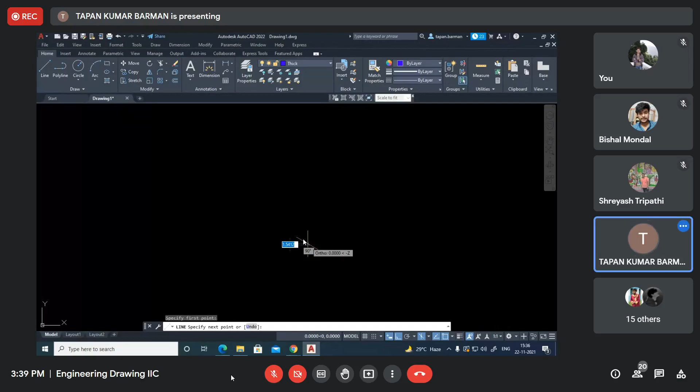So I'm starting to make one block.

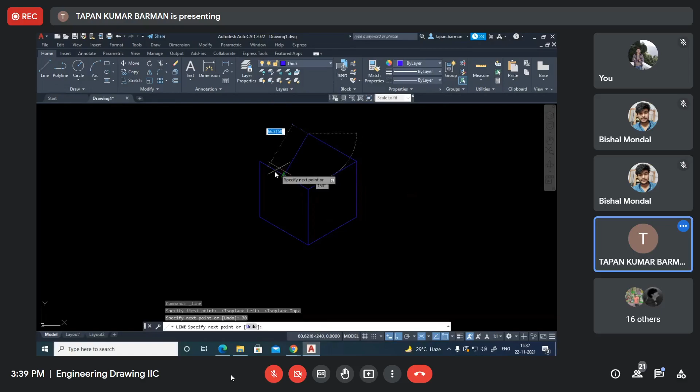Here we'll try to provide the dimensions. First thing, to provide the dimension here, we have to use align dimension. So I'm taking this one.

First thing, I should change the layer, so I should use a dimension layer. Say for example, I'm trying to provide the dimension from this point to this point of this line. Then dimension aligned from this one to this one.

The dimension shown here is not correct if I compare the drawing with this one. So always in our isometric drawing, we try to align the dimensions with the lines.

Now, how to align this dimension? So this dimension, or the extension of the dimension line, should be aligned with this line. Understand? If I provide another dimension,

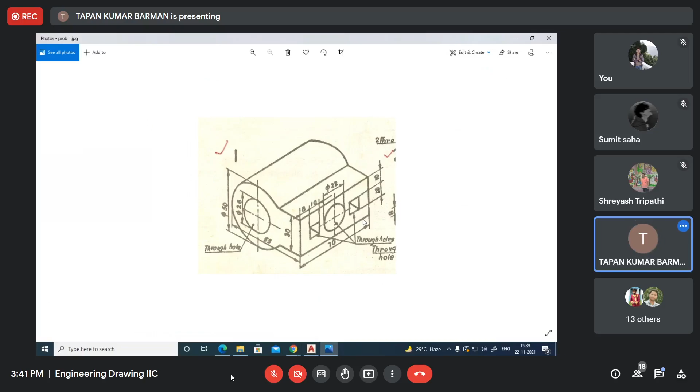So when I am trying to provide the dimension using align mode, but it is not aligning with the line, then what do we have to do? We have to do something else to make the dimension line align with this line. So to do that, we have to use the oblique option.

So if I consider this oblique option, you see, select objects. Say for example, I want to align this dimension line with this one. Understand? So here I will select this dimension. If the selection is correct, I will press enter.

Now here you see, enter obliquing angle. Now what should be the angle? So here we have to measure the angle from the east, that means from this line, and the line is making an angle with this horizontal line. If I draw one line here, this one, so with that line, that blue line is making a 30-degree angle.

As I mentioned earlier, in isometric drawing we have to make the lines with a 30-degree angle. So here also we'll try to provide that obliquing angle here. Say for example, I am putting 30 degrees here. You see now,

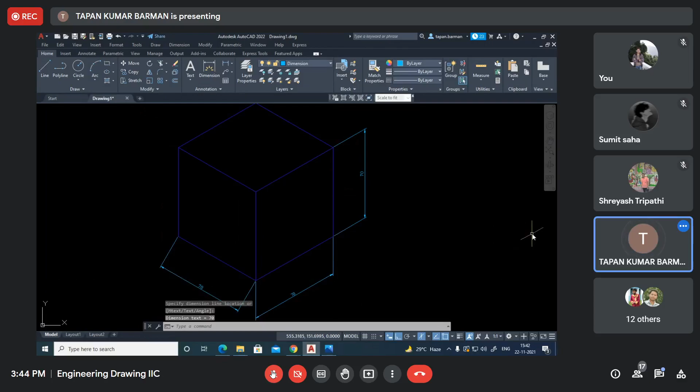Okay, then what should be the value? Dimension oblique. Now tell me, what should be the value here? Because this dimension should be aligned with this line. Do you understand? You have to measure the angle from the east in anti-clockwise direction up to this point or up to this line. The total line angle should be 270 degrees. Here again, you have to put 270.

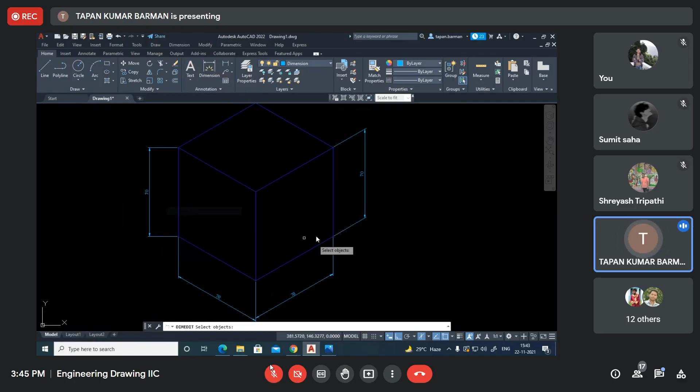Is it clear? Say for example, I want to put the dimension of this from here to here. Then make the oblique of this angle. What should be the angle now? The angle made by this line. What is the angle made by this line?

90 plus here how much? 60. Or 180 minus 30? 150. Okay, so if I put 150, then it should align with this.

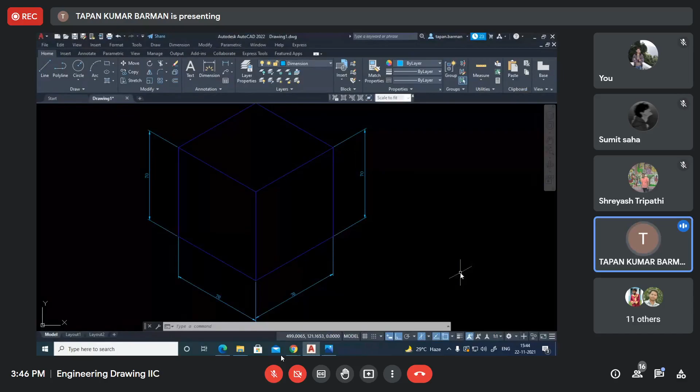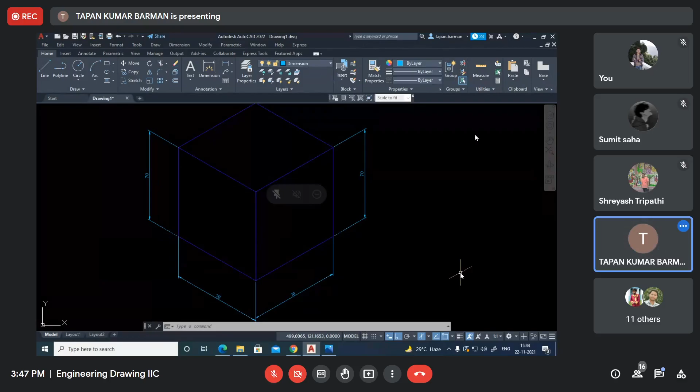Is it clear to you how to change the dimension here in AutoCAD for isometric drawing? Can you do that thing? Is there any difficulty to understand? Anyone, please try to do this thing and clear your confusions. Please practice and let me know. Any question, please?

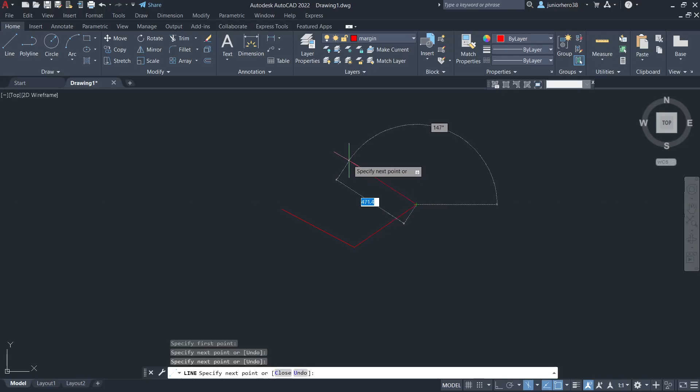Shreyash, have you done it? Sir, actually when I'm selecting dimension it is not getting selected. Then you share your screen. Then I can help you. Understand? You try to share your screen.

Sir, like I've drawn this. Isoplane left. Okay, go for dimension. Yes sir, I have selected. First sir, you go for dimension. Put one dimension. Aligned. No, first you take aligned. Okay, aligned. Okay sir.

Put one dimension. Without any dimension, you cannot edit that thing, right? Understand? So there should be one dimension to make the edit of that thing. Okay sir, now you can edit it. Clear? Yes.

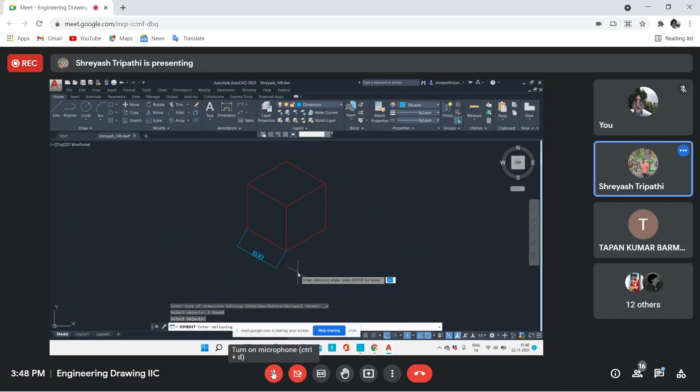Shovik Pramanik, what angle should be given, Shreyash, please? Are you doing it? Probably you may share your screen, then I can help you. Share your screen, I will help you.

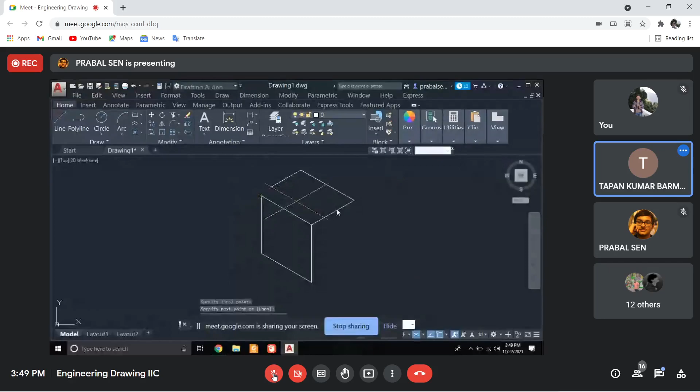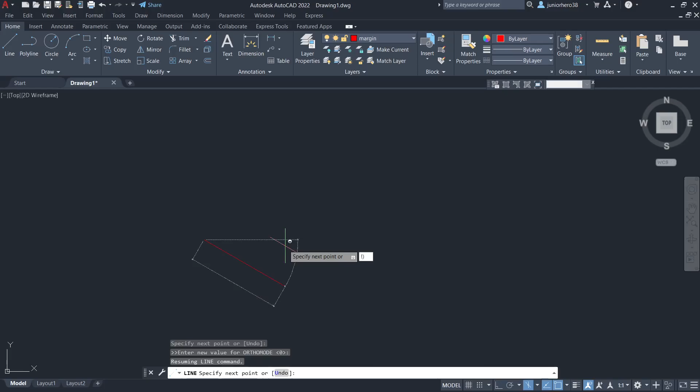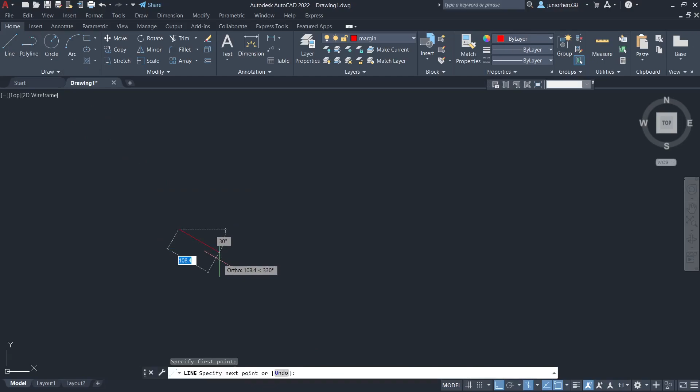If the figure is like it is a distorted figure actually. No, first that you take ortho option on. Yeah, I have taken that ortho option on in this, but I am just asking for that case if the ortho mode is not on and this line is not perpendicular, then also can I give the dimension? Anyway, you try to provide the dimension. Later on also you can do that thing. Okay, you try to put the dimension.

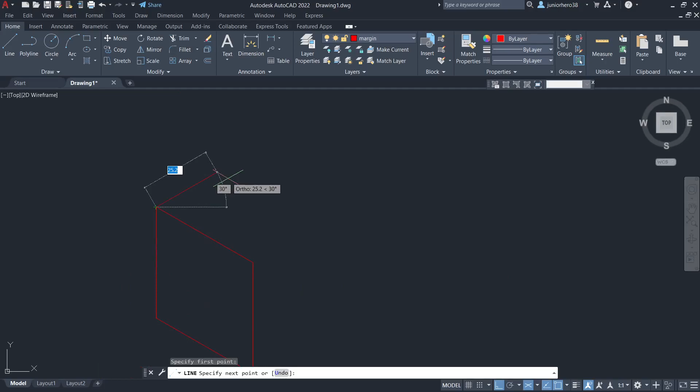Yeah, I have done that and this also. Okay, now you have put one dimension. The thing is you have to align that dimension with your lines. Yes sir. Okay, you take the side dimension. Okay, you take any one. Yes, probably that one. Now you go for the dimension editor, oblique option.

Go to dimension and take oblique. Okay, now, no. Okay, escape it and yes. Select object. Select the dimension. Select that line. Okay, enter.

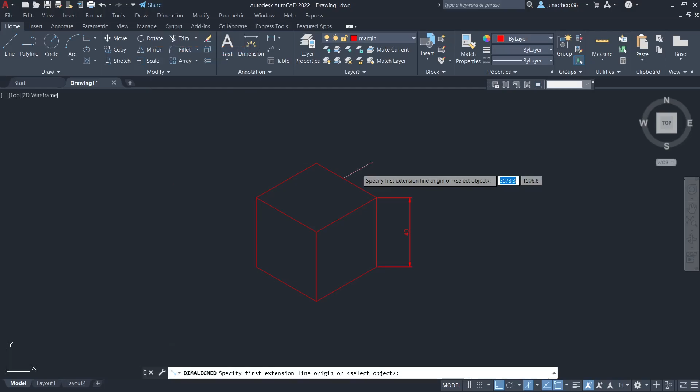Now you put the obliquing angle. What angle? So you have to align the dimension with the lines. Which lines? There are two lines. This line. What is the angle of that? That is 180 minus 30. 180 minus 30, yes, 150. Yes, you put 150, you put 150 angle.

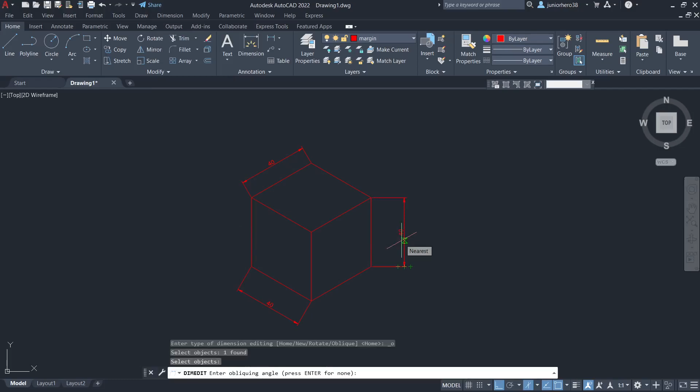Understand? So this way you have to find the angle and easily you can do that thing. There are other options also you may explore without considering this angle. But you just try to explore that.

I want to align that with that face, that surface, the upper surface. Yes, then if I write 30, no problem. So what should be the angle? 30? It is not 30, it is basically 150. It is 150.

You have to consider the final position of the dimension. Enter, 150. Yeah, see, always here 150. Always in AutoCAD, angle is measured from the east in anti or counterclockwise direction. Okay, so you have to remember that thing, how we are measuring the angle in AutoCAD. If you change that setting, then the angle value will also change. Understand? Okay sir, yes, clear.

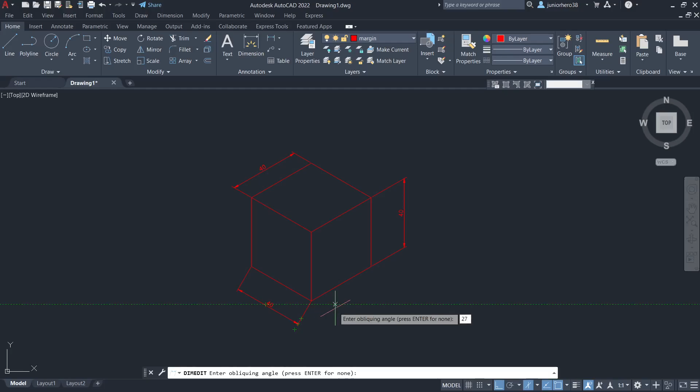No, take oblique option. Select object, enter. No, first you have to enter. Escape it, yes. Dimension. Follow the command line, okay? Select object, enter. Now you put 270 degree.

270. Right? Yes, sir. Thank you, sir.

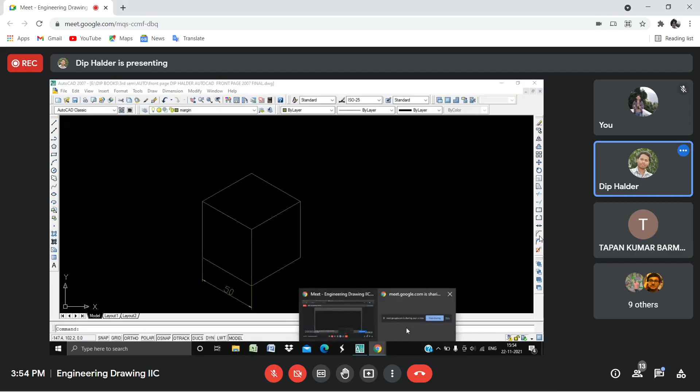Okay. Sumit Saha, Suchandrima. Okay. Shumit Shah,

Yes, sir, are you doing? Is there any problem? Krishna Bar, is there any problem? Suchandrima, is there any problem? Please let me know. Kamal Burai, are you with your laptop or not?

Reetam Sau? Yes, sir. Done. Okay, so there is no problem, I think. No, sir. If you have any problem, please let me know.

Now you see the figures. Say for example for this one. So in this assignment you have to make 3 drawings in one single A4 template.

I have started to present it. It is not presenting. But it's showing here, it is presenting. I don't know what is happening here. Okay, so it is taking too much time. Anyway,

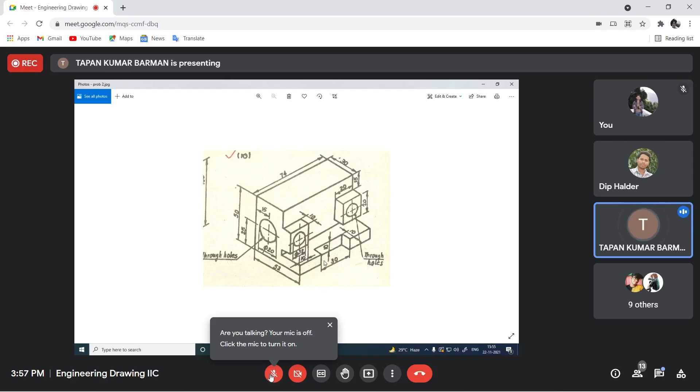So I think everything is okay with this drawing. Easily you can do this thing. For the second drawing, you see here also there are different parts of this. Here you will find some circles. There is one step, okay. So from this isometric drawing, try to do this thing.

It's another one, the third one. Here probably it is φ18. So if you do not get the value from this appropriately or proportionally, you may assume the value. Okay.

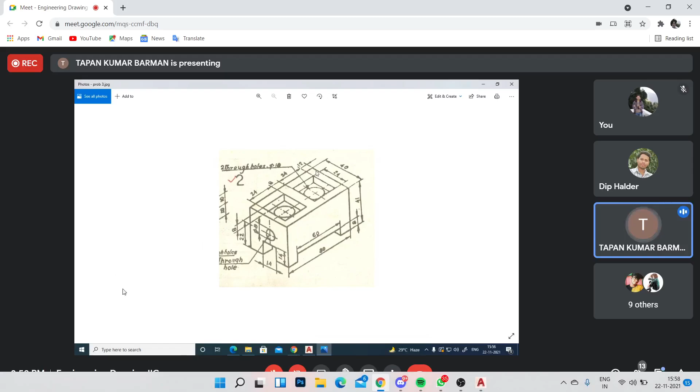Is there any problem? So first you try to visualize the object, try to make that thing. After finishing the drawing, try to put the dimension, and then only align the dimension with the lines. So is there any problem to make these 3 drawings?

So what you have to do? You have to take one A4 sheet, A4 template. So in the A4 template, you have to take 3 viewports, and using 3 viewports, you have to fit these 3 drawings.

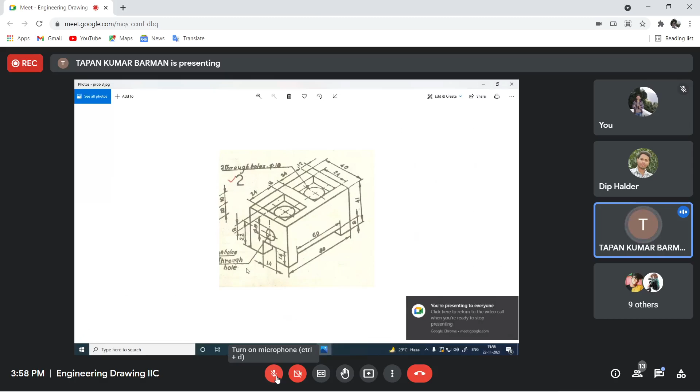1, 2, 3. Understand? There should be 3 viewports in your A4 sheet, and you have to fit these 3 drawings in that A4 sheet. So all the drawings should be made in model space, not in paper space. Is it clear to you all?

So if it is required, one can take one lower viewport scale also. No, 3 viewports. There are 3 drawings, so there should be 3 viewports to show these drawings.

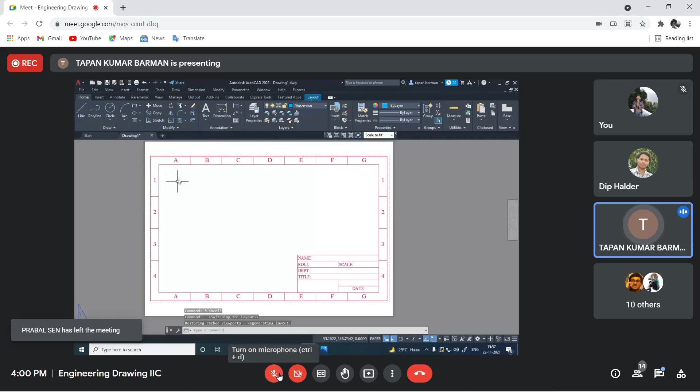In one model space, you will make 3 drawings, right? But in your A4 template, there should be 3 viewports to show 3 different drawings. Is it clear? Say it again, sir. Say for example here, so there should be 3 viewports.

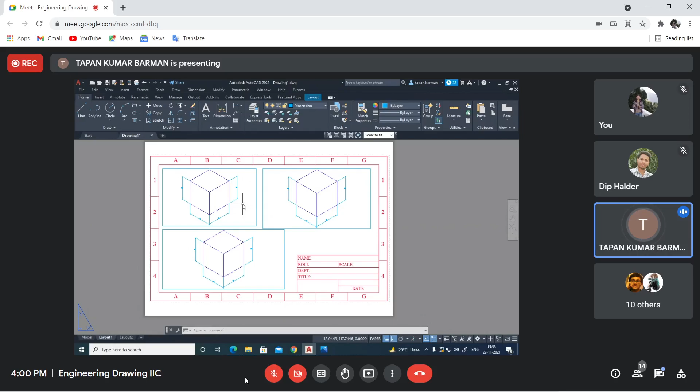One viewport here, another viewport here, say another viewport here. Is it clear? In these 3 different viewports, there should be 3 different drawings. Though the space is same, it's model space. Inside this viewport, all the spaces are model space.

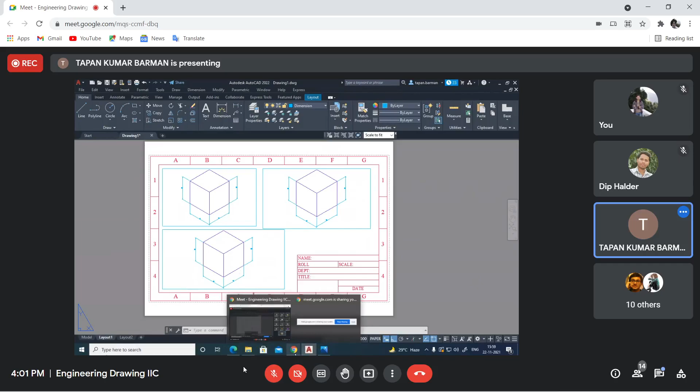So here we will show, say, viewport problem number 1, problem number 2, problem number 3, like this. Have to do that part, is it clear to you? If you have any confusion, please let me know. Any problem? Any question?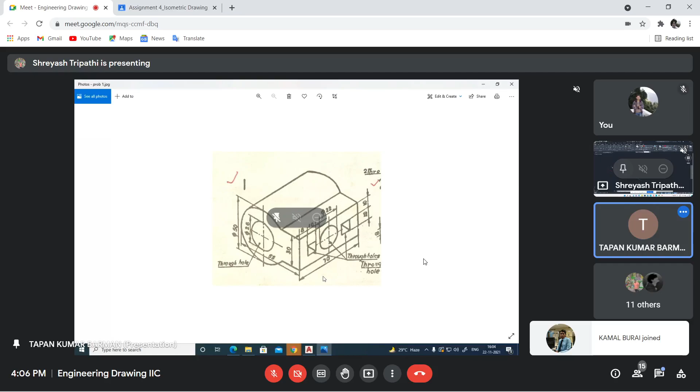Sir, how can I find? You see, from your end midpoint or the center line, when you have one circle, your vertical line, from there the end of the circle is 50 millimeter or 55 millimeter, I think. 55 millimeter, right? Yes, sir. And also you know the distance between two parallel lines, 30 millimeter. So what you can do, you can draw the full circle, full isocircle. You can also draw the lines with 30 millimeter gap where it will intersect.

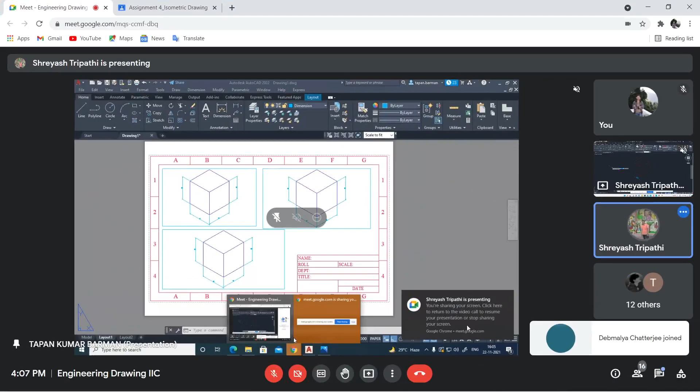So you have to trim that straight line. Is it clear? Which means, sir, I have to draw like two lines. First you find your starting point. Yes, sir, like this is my starting point, and this is my ending point. Okay, sir. So from that point, from the mid, if we try to locate the center of this or end of the circle, you will find 55 millimeter. Understand? Yes, sir.

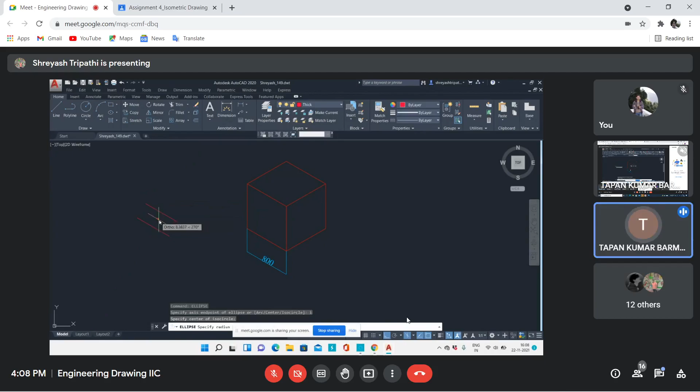You have to take isocircle. Yes. Sir, but the scale is something like big. No, basically, you first start from the... I am sharing like this. Okay, just please wait. Okay, you start from this. My screen is visible to you? Yes, sir.

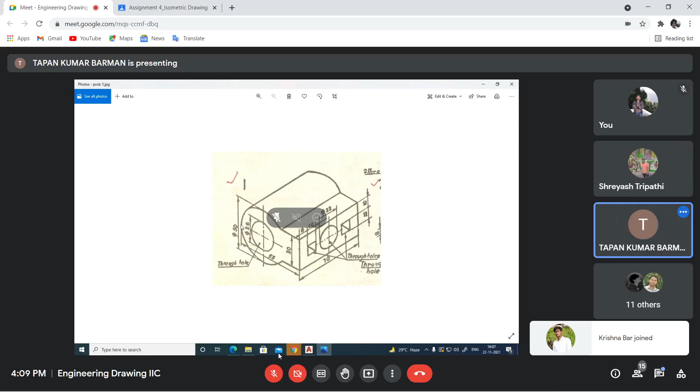Okay, so you may start from this point, right? From this point, you may start to make this line with arbitrary length, this line with arbitrary length, but the gap is 30 millimeter, right? Yes, sir. So there should be two lines. Okay, now this center line, extreme point should be this quadrant, this one. Yes, sir. So from this point, from the midpoint of this, you may find 55 millimeter. Okay. Possible? Yes, from here you can measure 25 millimeter, this center point. There, you can draw the full isocircle of this.

Right? Then definitely that isocircle will intersect this line, also this line. Okay, sir. Then you trim that extended part. Okay, sir. Understand? Yes, sir. Okay, is it clear now? Yes, sir. Okay, now let me know any other question. Any other question from your side?

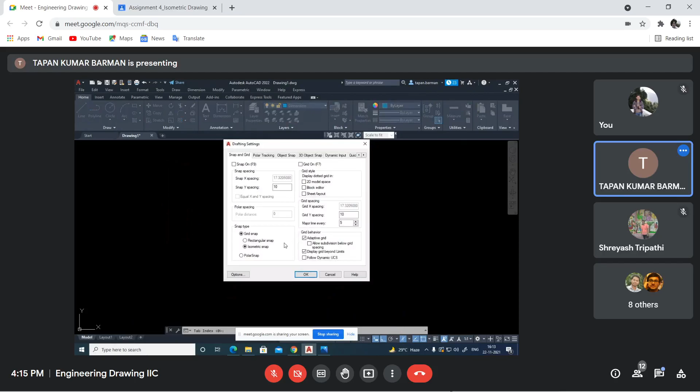Say for example, I have this type of line, right? And I want to provide the fillet here, fillet radius here. So what I will do, I will take the fillet command. First thing we have to see what is the radius value given in that command, or by default what is the value. Here you see current settings, mode, no trim, and radius 0.

So with this setting, we cannot provide any fillet radius there because the radius of the fillet by default is 0, so you cannot make that thing. So first thing you have to check, and accordingly, depending on the drawing, you have to change the value. So first I want to change the radius value, so here suppose I am taking 10 millimeter radius.

Also you may change the trim option. To change the trim option, I have to take T. Here the by default option is no trim, so I want trim. Again I now select first object, this one and this one. You see, this is the fillet.

So please check the setting, what is the radius value taken as default, then only you go for this. Select the 2 components, easily you will get it. Got my point? Probably you did not set the radius value, and that is why you're not getting the fillet there.

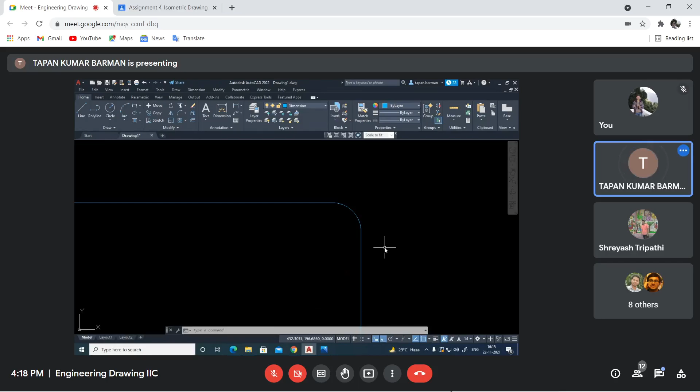One thing, sir, in isometric mode, we can't use the offset command. Try it - it is not working, sir, it is going to another direction, not what I am wanting. Understood, understood. So it is not possible then.

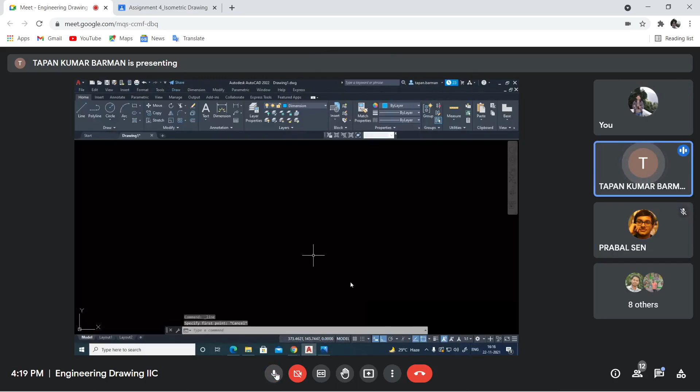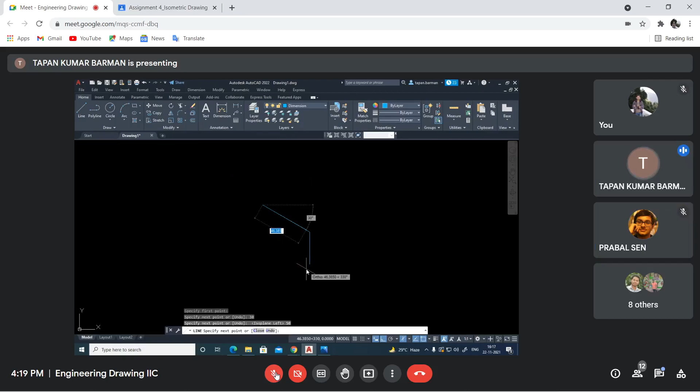One minute, what is the problem? You say isometric - what I will do? I'll start from here, I'll go 30 millimeter. I'll change the value - any value, say 50, anything, millimeter. From here also I'll go for 50 millimeter. Then what is the problem? How much time does it take?

Offset you can't do, but you can do it because you can take the end of this line, also you can select the midpoint. You can go for 55 millimeter. You may change the layer, go for the construction one or anything else. So what is the problem? Easily you can do it. If the offset is not working, then you have to find a different way to make it.

Okay sir, understand? Yes sir, you just practice. You will get better procedures or better methods to make the object or the drawing. You will get different shortcuts also to make the drawing. You just practice, you will find. You may explore in more detail.

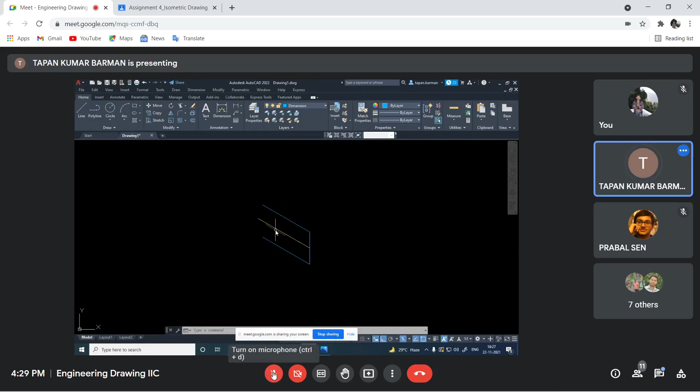Understand? So you have to find the center point here. If you know this thing, from this point you may find the center point. Center point at 25 millimeter distance from this point, right? So taking 25 millimeter distance from here, you can make the circle.

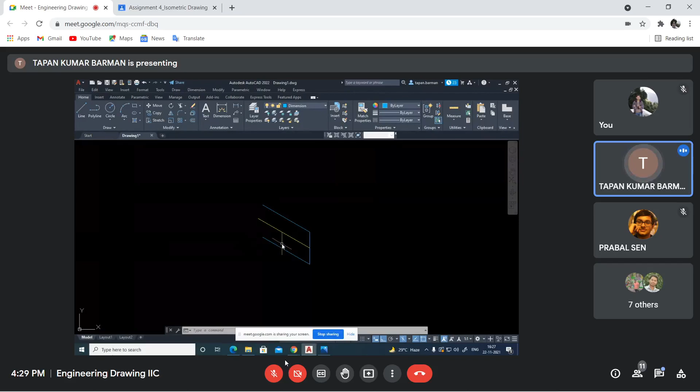So that's done. Then you can trim these lines from that circle. You will get it. Just try a little, when you actually try to make the drawing, easily you may find the ways how to make this thing.